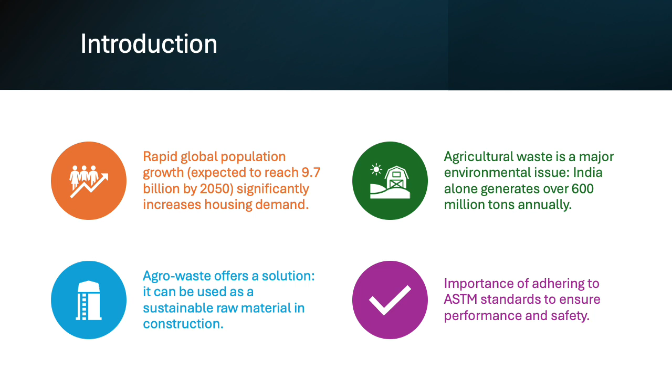These residues not only contribute to environmental degradation, but also represent untapped potential for creating sustainable building materials. Our research focuses on leveraging agro-waste as an alternative resource for building materials, specifically ensuring these materials meet ASTM standards for construction, quality, and performance.

The primary objectives of this research are fourfold. First, we wanted to understand the physical, chemical, and thermal properties of agro-waste materials. Specifically, we focused on groundnut shell ash and its potential as a substitute for cement and aggregates.

Second, we wanted to evaluate the environmental and economic benefits of using agro-waste in construction, particularly the reduction in carbon footprint. Lastly, this work aims to promote the use of sustainable materials in the building sector and reduce dependence on traditional conventional resources like cement, sand, and more.

Our methodology involved several key steps. First, we conducted a comprehensive literature review, which examined various types of agro-waste, including groundnut shell ash, coconut shells, and oil palm shells. We focused on their chemical composition and potential for use in construction materials.

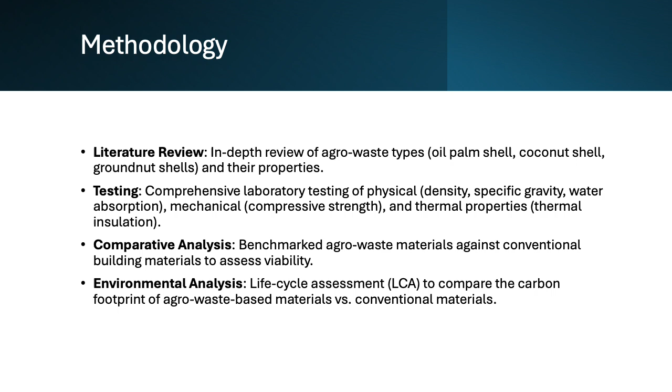One of the key findings of our research, which I want to highlight, was the potential of groundnut shell ash as a building material. Chemically, it contains a high percentage of silica, which makes it an effective pozzolanic material, meaning it can react with lime or cement to form a cementitious product, or we could say sticky material if we want to be non-professional. Additionally, groundnut shell ash contains minerals like potassium, calcium, and iron.

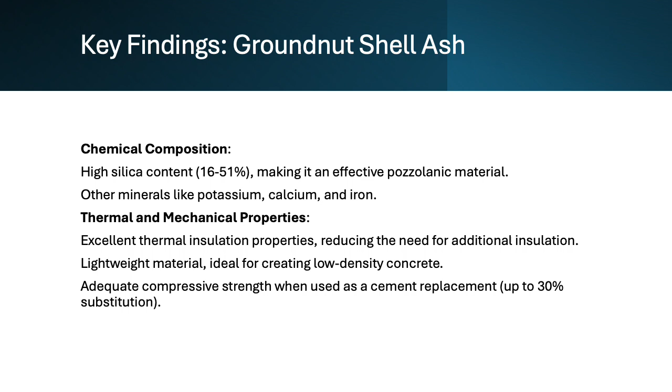In terms of properties, we found that it has excellent thermal insulation properties, making it a potential alternative to other insulation materials. The material is also quite lightweight, which is very good for earthquake regions, and can help reduce the overall weight of the structure as well. Our tests also showed that groundnut shell ash can replace up to 30% of cement without sacrificing compressive strength.

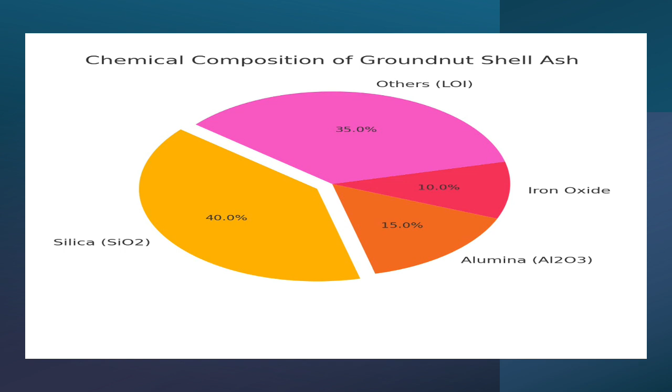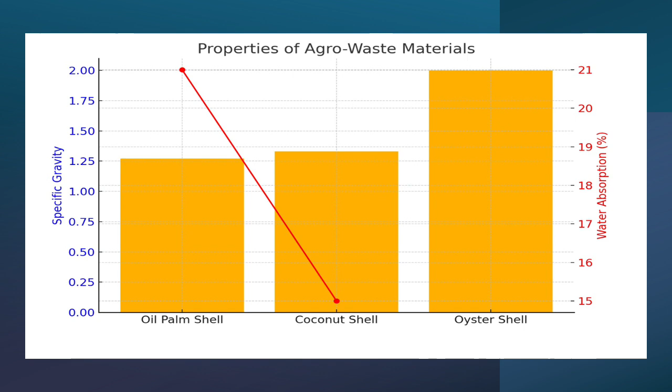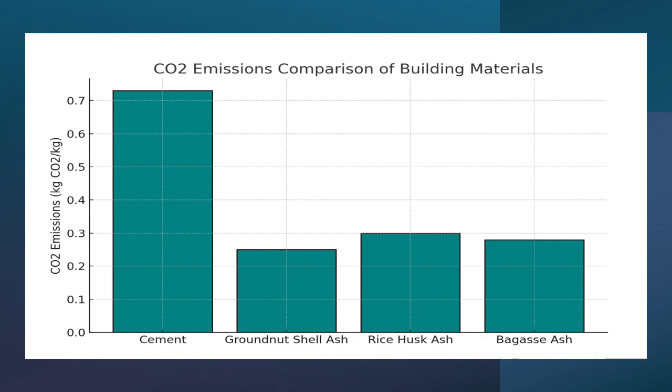All right. The environmental benefits are also significant, as we said. By substituting agro-waste for traditional building materials, we can reduce the carbon footprint for most of the projects out there in construction. This helps to reduce CO2 emissions associated with cement production and also mitigate the environmental impact of agro-waste disposal, which is often burned or sent to landfills.

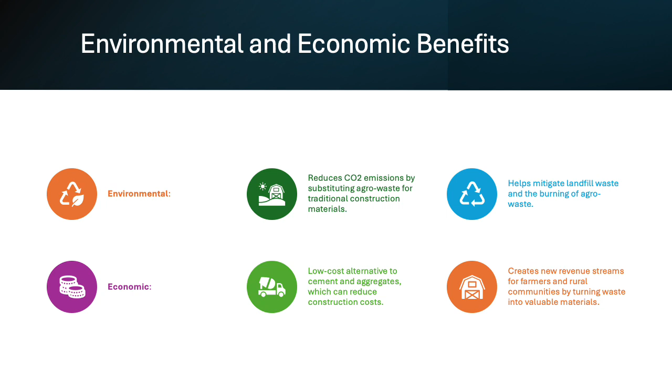On the economic side, agro-waste based materials are cheaper to produce, providing a cost-effective alternative to normal building materials. Also, I would like to say that this can create new opportunities for farmers and rural communities by turning waste into a valuable resource, stimulating local economies and creating wealth.

And of course, despite the promising potential, there are some challenges to overcome. One major issue is the variability in the quality of agro-waste materials. Factors such as the source of the agro-waste, seasonality, and how it's processed can lead to inconsistent material properties. Additionally, while agro-waste materials are lightweight, this can limit their application in load-bearing structures unless they are properly reinforced.

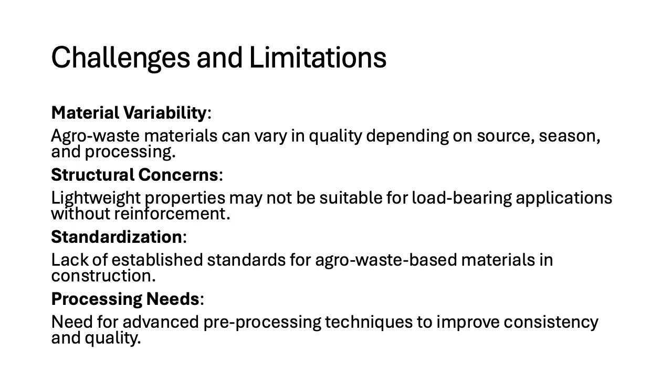There is also a lack of established industry standards for the use of agro-waste in construction, as they are pretty new discoveries, and this presents a challenge for large-scale adoption. And finally, agro-waste needs advanced pre-processing techniques to ensure consistent quality and improve its properties for building material use. This is also a graphical view of the agro-waste challenges in building materials: inconsistency in quality, structural limitations, and the severity in the y-axis.

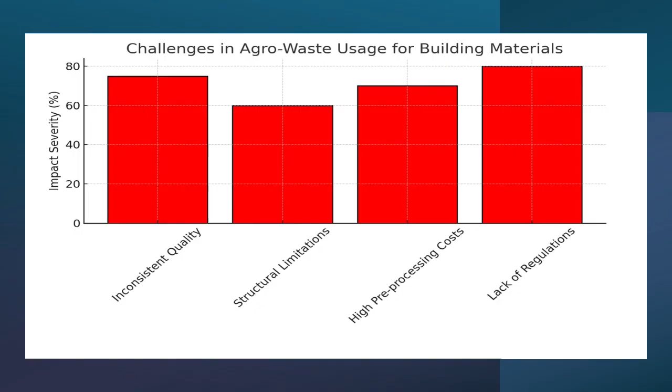These materials, that is agro-waste, have several exciting applications in construction. For example, groundnut shell ash can replace part of the cement and fine aggregates to create lightweight concrete, which is particularly useful for reducing the overall weight of buildings, especially in earthquake regions like Turkey and some parts of Syria and places in the US like California and what have you.

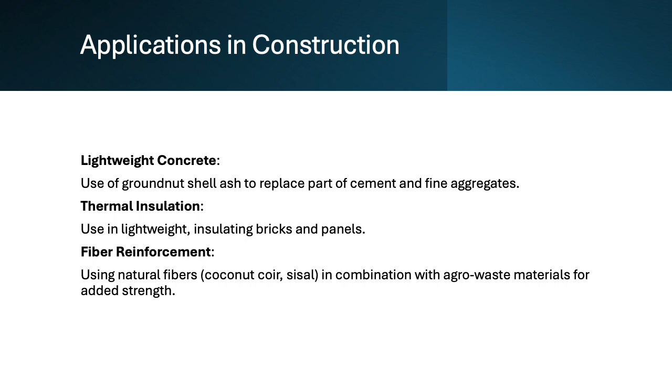Another key application is in thermal insulation. Agro-waste materials, especially those with good insulation properties like groundnut shell ash, can be used to create lightweight insulating bricks and panels. Additionally, agro-waste can be used in combination with natural fibers like coconut coir and sisal to create stronger, more durable and even long-lasting materials for construction.

Looking ahead, I would say there are several areas for future research. First, there is a need for standardized guidelines and regulations for the use of agro-waste in construction to ensure it's safe and reliable to use. Further research is needed also into hybrid materials that combine agro-waste with traditional construction materials like cement and sand to enhance their properties.

I would say large-scale trials and pilot projects will be essential to test the real-world performance of these materials. And finally, collaboration between researchers, industry stakeholders, and policymakers will be crucial for promoting the widespread adoption of sustainable construction materials or practices.

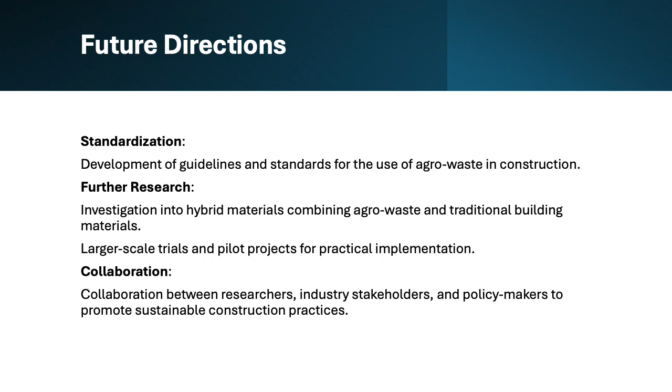In conclusion, agro-waste represents a promising solution to the challenges facing the industry today. It offers a sustainable, cost-effective alternative to traditional materials while providing environmental and economic benefits. However, there is still much to be done, and further research, standardization, and collaboration are needed to ensure that these materials can be used safely and effectively on a large scale.